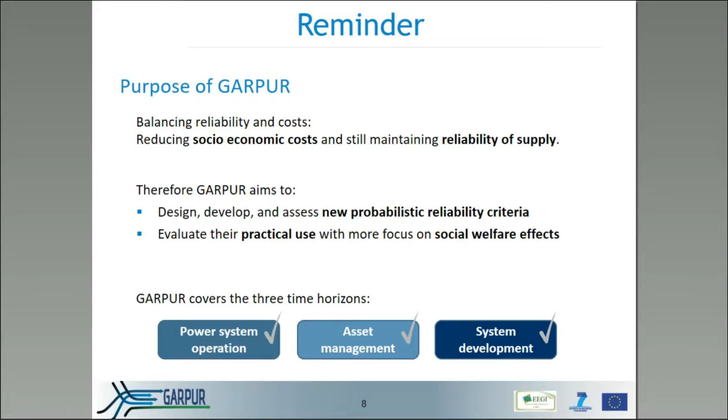I should also recall that the goal of GARPUR is to cover in a coherent way the three main types of contexts where reliability management is carried out by TSOs, namely power systems operations, asset management, and system development. These problems span different time horizons, from very short-term real-time operation to rather long-term in system development, for instance.

This slide summarizes the overall approach of GARPUR. In the upper part, development of a probabilistic reliability management framework, and in the lower part, development of a socioeconomic impact evaluation framework. This should be applicable over the three contexts I've just mentioned: system development, asset management, and power system operation.

In the project, we have developed new criteria and also a prototype quantification platform. One of the pilot tests presented later on by Pascal is based on using this quantification platform in order to compare, from a socioeconomic point of view, the N-1 classical reliability criterion used today in practice with the new probabilistic approach developed in GARPUR.

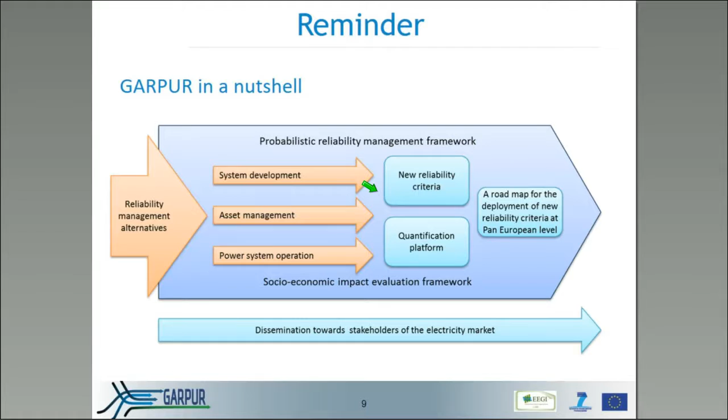Finally, based on these developments, the GARPUR project has developed a roadmap for the deployment of new reliability criteria at the pan-European level, and the last part of the presentation will focus on a very quick summary of that roadmap.

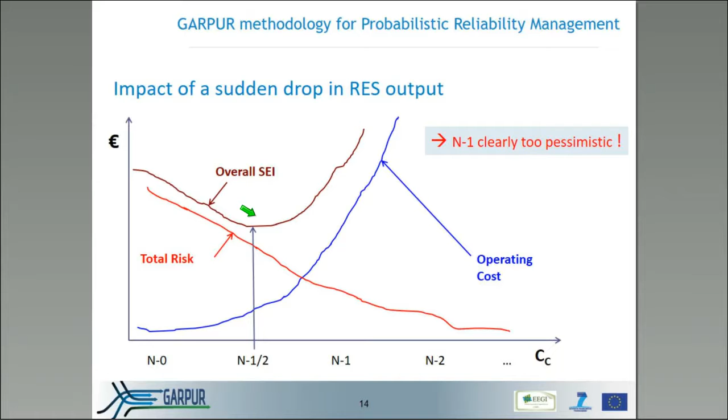Now, if the system operating conditions change, these curves can change as well. For instance, imagine there is a sudden drop of renewable energy output - then maybe the total risk curve will not really change, but the operating costs would possibly increase a lot if you still want to maintain the N-1 criterion, so that the optimum on the brown curve goes to the left, and maybe under these conditions it would be more appropriate to not comply with all N-1 contingencies, but with a smaller subset.

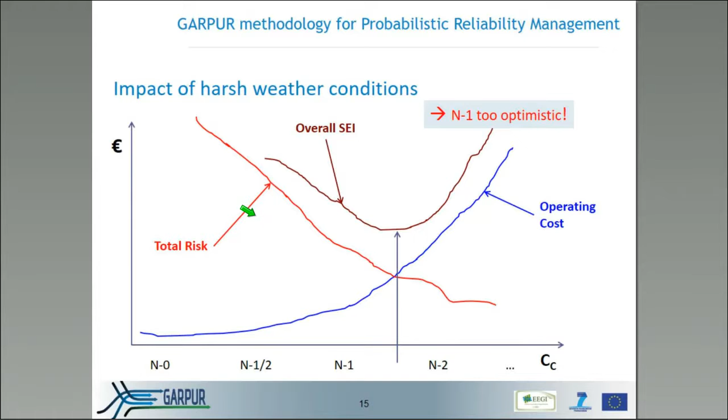And of course, in extreme weather conditions, the probability of multiple failures will increase, and also if there is an interruption, the consequences on the consumers who have no electricity will typically be worse if the weather is harsh than if the weather is mild, so that the total risk curve, the red curve, strongly increases, and in this case, N-1 criterion would be too optimistic, and you should rather add more contingencies to reach this optimum trade-off. So the bottom line is that depending on the conditions, in some cases we should cover fewer contingencies than N-1, and in other cases more contingencies than N-1.

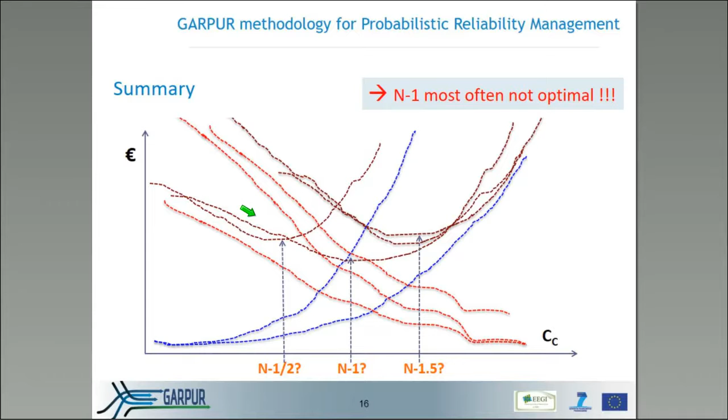So the GARPUR project has developed a coherent methodology which allows us to approach this socioeconomic optimum. The main conclusion is that we need to dynamically exploit all the information that is available in the particular context, for instance in real time. This information has to do with evaluating the socioeconomic cost of service interruptions, but also with probabilities of contingencies and other kinds of failure modes, hidden failures, for instance.

Also, because in operation more and more there is a combination of preventive and corrective control used to operate the system, it's important to take into account the fact that corrective controls, which are taken just after the occurrence of a contingency, are taken under strong time pressure, and there might be some risk of failure of corrective control, so that even if everything was well prepared, the system is not able in the end to withstand the contingency. That has also to be taken into account.

Various factors will influence these probabilities and these costs, like weather conditions, operating conditions if the system is under more stress, and the fitness of the assets of the system. If you have well-maintained transformers and lines, normally their failure rates will be smaller than if you have less well-maintained lines. So this already shows that asset management and maintenance in particular may have an impact on reliability in operation, and this should be taken into account as well.

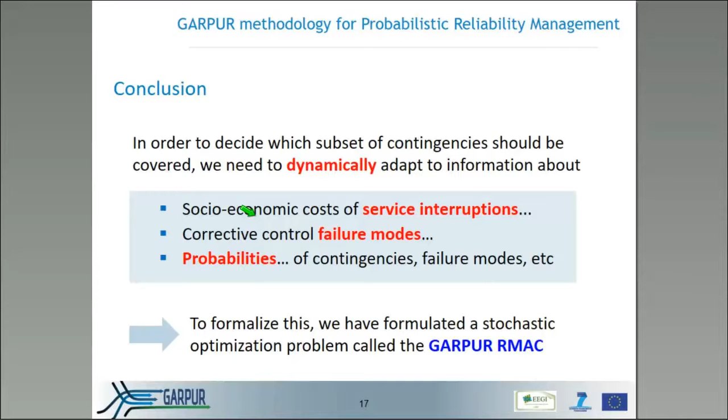Without going into any mathematical formulation here, which can be found in our many deliverables that we have provided in the project, this led to the formulation of a series of stochastic optimization problems called the GARPUR RMAC.

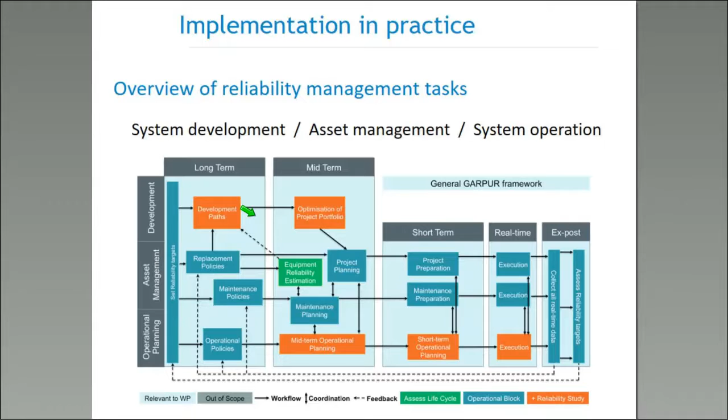And these can be applied to the different problems that the TSOs have to solve, from system development, asset management, and system operation. So I will, for each one of these contexts, discuss a little bit what the problem addressed here is.

To start with system development, the purpose is to identify those transmission capacities needed in the future, and justify how we propose to provide them by a careful cost-benefit analysis. What kind of additional line should possibly be built, and what should be the capacity of that line? Of course, the larger the capacity, typically the better from the market point of view and also from the reliability point of view, but of course the higher the investment costs.

The problem setting here is that you look at a target year or a series of target years over the future, let's say from 2025 to 2035. Then you have to screen the relevant future market and operating conditions over that horizon, identify possible bottlenecks in terms of market and reliability issues by simulating how the system would operate over these years, and from there determine, thanks to the expertise of the planning engineers and the results of these screening studies, whether and where to build new lines.

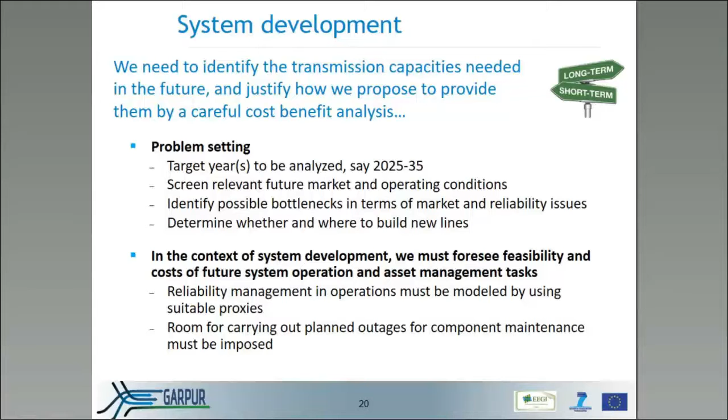So in GARPUR, we do that modeling by introducing the concept of a proxy. I will come back on this also during the next two applications.

Quickly, asset management, which is a very important activity, especially because power system components come closer to their end of life. Most of the lines and transformers that we have in the transmission system are already several tens of years old. So it's quite important to analyze how much and where to invest in maintenance and replacement. How often should we do the maintenance, and where should we do it in the best way, and also the replacement of some of the older equipment.

Once you know how much of these activities you want to plan for the future, maybe 10 or 20 years, you also have to be able to carry them out, which means you have to be able to take some of the equipment out of operation to carry out the maintenance or replacement activities. While these activities will, after being carried out, typically increase the reliability of the system, during the outage the reliability level of the system goes down. So the idea is that you should do these outages at the moment where the impact on operation—this combination of operating costs and expected costs of service interruptions—is the least negative.

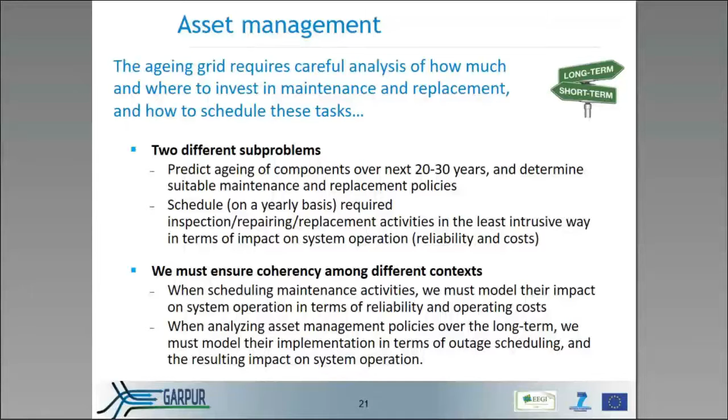Finally, the last class of problems we have worked on concerns system operation, where the question is to take decisions in operation planning maybe a few hours or a few days ahead in time, up to real time. The point is to optimize the balance between operating costs and the risk of power supply interruptions, as I explained in my first set of slides with my three types of curves.

So here we have looked at two problems: the real-time operation problem, where the point is to take into account current operating and weather conditions to evaluate risks of power supply interruptions over a relevant set of possible contingencies and to mitigate them.

And in look-ahead mode, operation planning, where the point is to prepare real-time operation to ensure robustness with respect to uncertainties in load, renewable infeed, market, and weather conditions.

In look-ahead mode, you can still postpone some outages planned for maintenance, or you could possibly reduce the capacities given to the market if you think the weather conditions will be extreme and it is better to reduce a little bit the distance from generation to consumption.

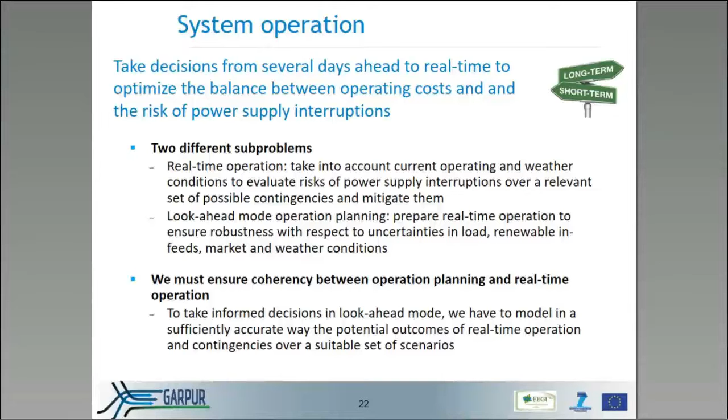This finishes my introduction with the following slides, where these different Russian dolls basically represent the different contexts, let's say from the extreme right part, where we have the automatic response of the system, and then real time, going progressively towards the left part of the slide: real-time operation planning, maybe midterm outage scheduling, and so on.

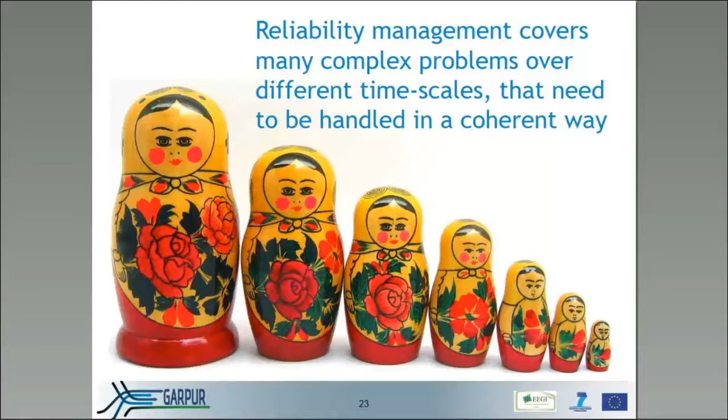So with that, I give the word to Gudjon for the presentation of the results from near real-life pilot testing at Landsnet. Thank you. Yes, thank you, Louis.

In this webinar, I will quickly go through the results of the Landsnet pilot test by answering these three questions: Is the computation fast enough? Does the output make any sense? And how sensitive are the outputs?

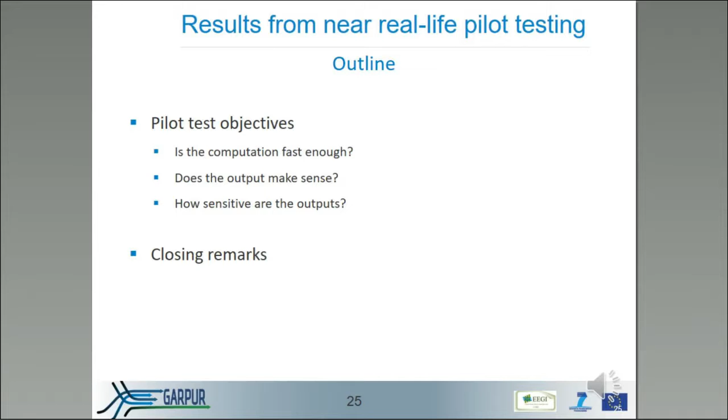Description of the pilot test implementation and methods can be found in detail in the first webinar of this series. But here is a short overview of the Icelandic system and the model. The Icelandic system is small and thus manageable for a pilot test like this. The model we used contains 85 buses, 107 branches, 71 generators, and 65 loads.

The pilot was programmed with performance in mind from the start, but that was not optimized against, since we felt it was more important that it would work and be simple to debug and validate the outcome. The pilot was built in MATLAB using MATPOWER and IPOPT, with additional auxiliary tools made in Python, and outputs and displays written in HTML and JavaScript.

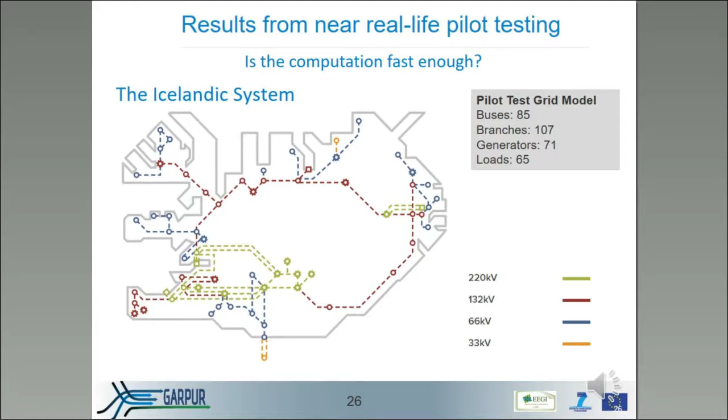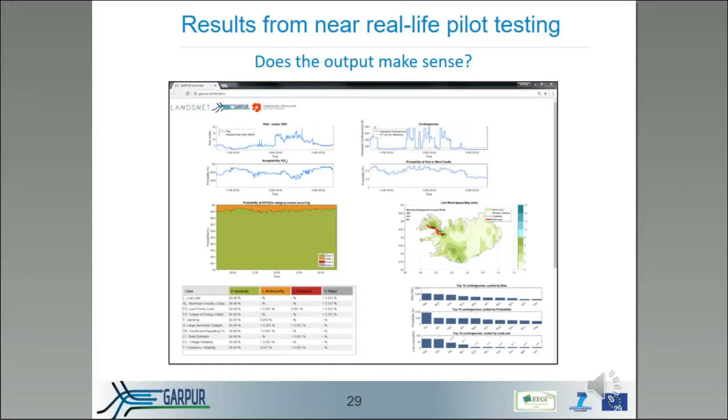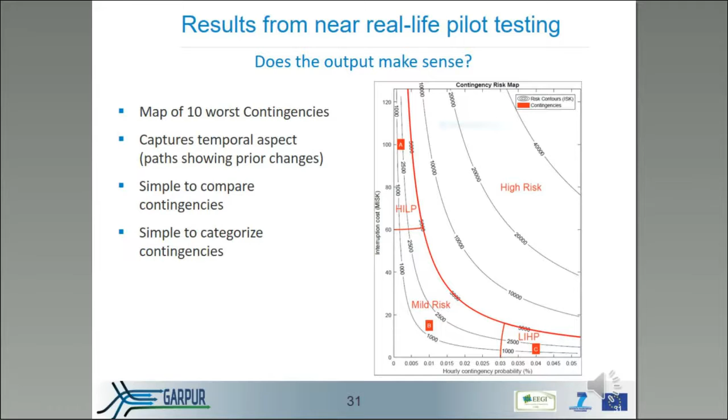This figure is the same as the previous one, but it shows how you can categorize the contingencies that you have and see if it represents what you feel for each one of them.

If you know that something is rare and has high impact, it should be in the box marked A: high impact, low probability. And if it moves to the right into the high risk zone, you might want to check in on that.

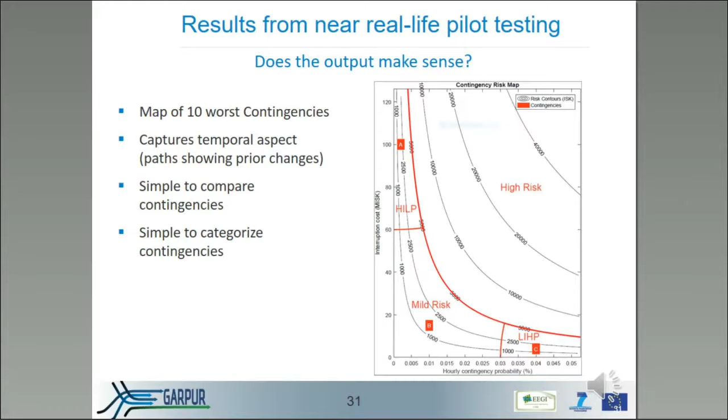We feel that this represents what the operator is thinking in the control room, since from experience he knows it's more likely for things to happen in storms than in calm weather.

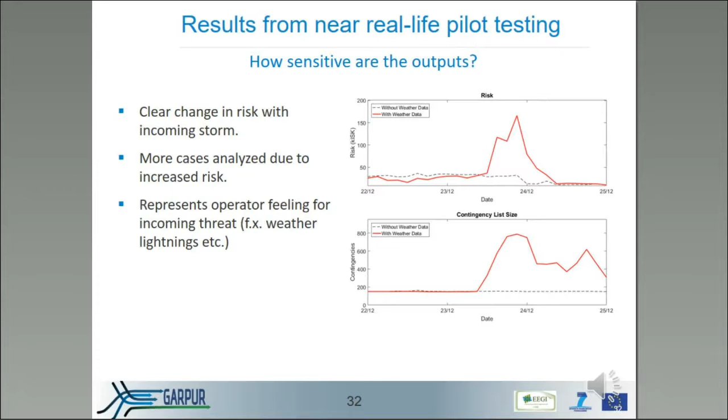We also compared the risk with and without system integrity protection schemes. In our system, we have a couple of those schemes in place, and we found that in some cases the risk was greatly overestimated if they were not taken into account.

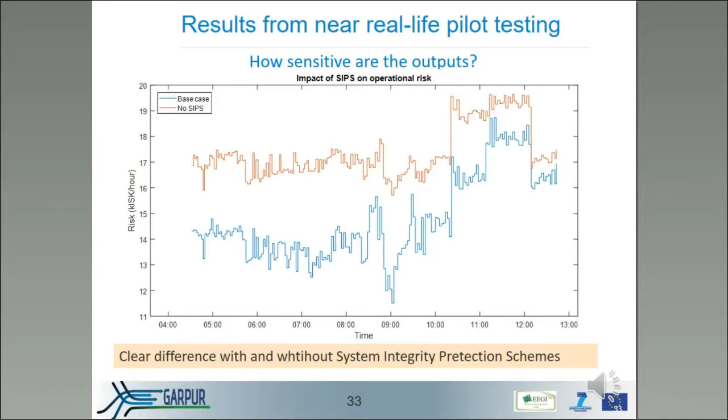The pilot showed that this can be done, and that this can be calculated for near real time, without using huge computers.

The output represents the operator's feel for the system and impacts of threats. In most cases, the outputs agree with experts, but we admit that we still have some bugs and sometimes have something weird going on.

We see a need to validate the individual modules of the pilot test and the methods proposed in GARPUR. For future implementation, there's a need for a fast estimation of dynamic events.

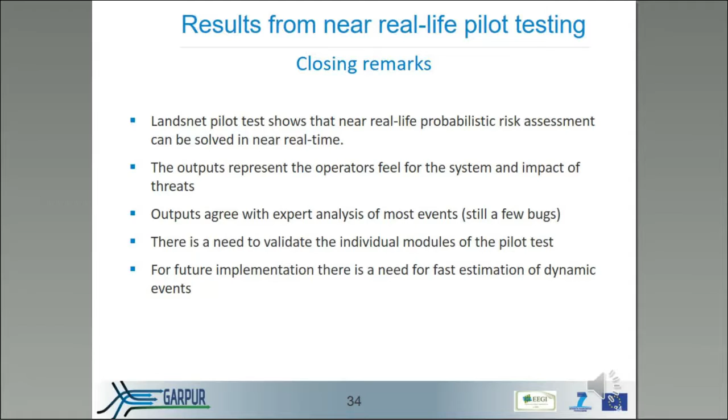And that concludes my talk, and I hand it over to Pascal.

Okay, thank you, Pascal from RTE R&D. So I will present the RTE test case study using the GARPUR quantification platform prototype.

First, the pilot test objectives, then the GARPUR, the GQP main features of the test, and the test and closing remarks.

The pilot test objectives were to highlight the differences between the classical N-1 reliability management criteria and the more probabilistic ones using the GQP.

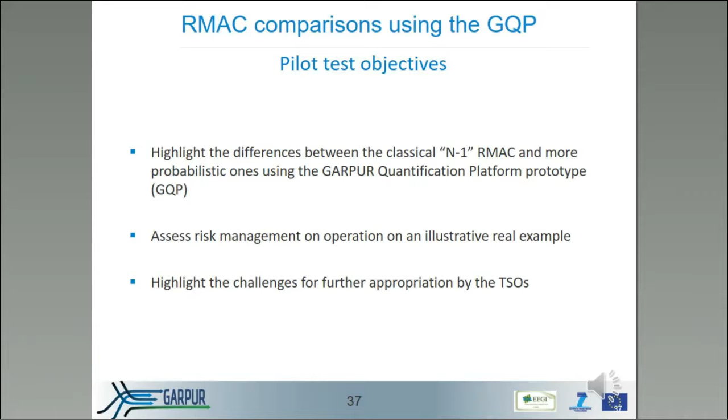And to assess risk management on operation, but this on an illustrative real example, in order to highlight the challenges for further appropriation by the TSOs.

Regarding the problematic considered, we are dealing with congestion flow management on the southeast region of France.

We focus more precisely on the so-called Tavel-Realtor corridor, which has been responsible for two-thirds of RTE's congestion costs in 2013, and we will look at risk management derived decisions versus real-time decisions.

So in yellow, you can see the Tavel-Realtor corridor, which is formed by two 225kV lines, and in brown you have alternative paths, alternative electrical paths.

The purpose here is to balance the flows on those different paths in order to supply the load in the blue zone, which could be very problematic due to the fact that generation is limited in the blue zone.

You also have to consider seasonal aspects, like renewable energy source variations in the blue zone.

Today, the present operating rule is that we take into account preventively the N-2 Tavel-Realtor, depending on weather conditions, for example, if we anticipate storms or fires in summer.

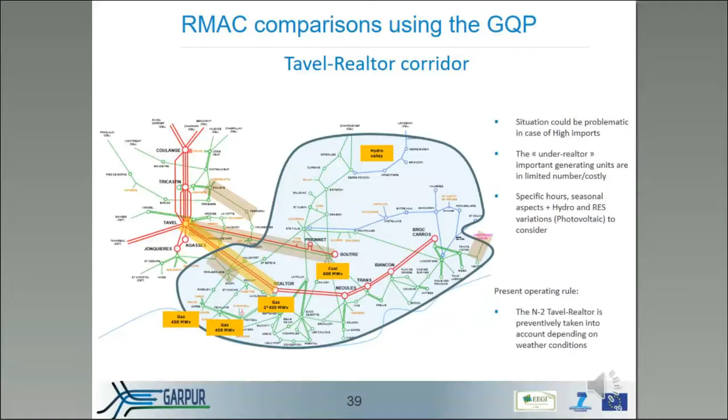We use a two-level optimization problem for arbitration between preventive and corrective actions to build the preventive solution.

The GQP uses a CPLEX mixed integer linear program solver in order to model those arbitrations, to take into account TSO acceptability constraints on the solution given by the GQP, to model generation startup, phase shifters, topology shifts, and to model also failure of corrective actions.

The computations are done using the DC direct current approximation, but there are AC checks in order to validate those computations performed in DC.

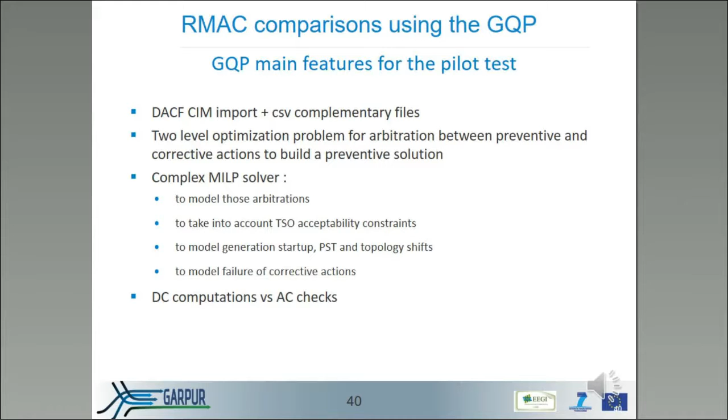So we use the three-step approach provided by the GQP. First, we build a preventive solution for a specific RMAC and a specific set of contingencies.

This is based on the best forecast which is given by the DACF file. And then we use the uncertainties we have around the forecast in order to build adjustment, real-time preventive adjustment of the day-ahead preventive solutions.

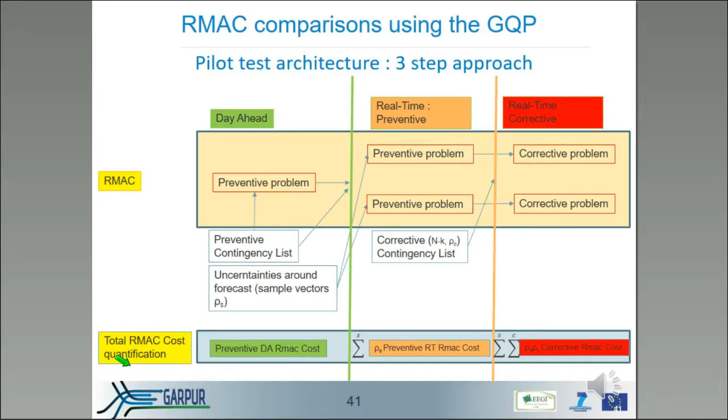And we finish with a last stage corrective problem, which is performed on a larger set of contingencies. So when we sum up the three costs, the day-ahead preventive cost, the real-time preventive cost, and the corrective cost, we have the total cost quantification which is associated to the RMAC.

For comparison, we have defined four RMAC comparative problems, which are the N-0 problem. So we don't consider the contingency for the preventive solution.

The classical N-1 problem, only N-1 contingencies are considered to build the preventive solution, but with the same probability and without authorizing a trade-off between preventive and corrective actions in order to build the preventive solution.

And we have also two statistical RMACs. The first one, called RMAC N-1, considers only N-1 contingencies, but we use their probabilities and we authorize the trade-off with corrective actions in order to find preventive solutions.

And we have also the RMAC N-2 problem, which is similar but with the addition of N-2 contingencies in the problem in order to build the preventive solution.

And we finish, for all the RMACs, with the same last stage corrective problem, which is identical, which gives us the residual risk estimation considering the effect of a preventive solution.

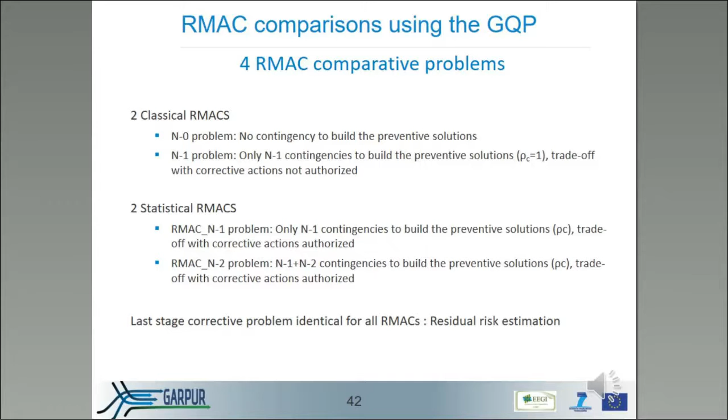So we have defined first a base case parametrization in order to compare the four different RMACs on a fair basis. And then we have performed complementary sensitivity tests in order to highlight the impact of the contingency failure rates, the uncertainties around the forecast, the TSO acceptability constraints and failure of corrective actions impacts, control action plus more N-K contingencies put into the problem.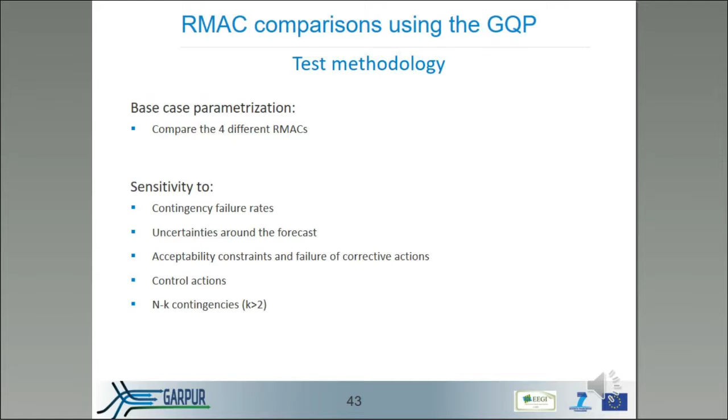On the base case parametrization test, we have put into evidence the fact that the N-0 problem could be over costly. This is due to the fact that the residual risk is not mastered for this problem.

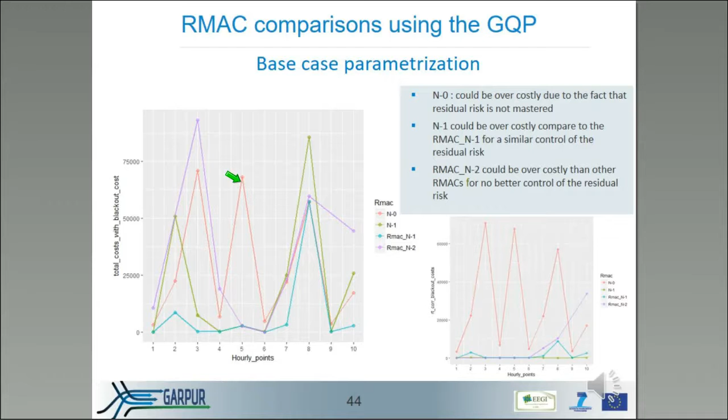If we compare now the N-1 problem in green to the RMAC N-1 problem in blue, we can see that the N-1 problem could be over costly compared to the RMAC N-1 problem, and this for a similar control of the residual risk. But for the RMAC N-2 problem, we find that this problem is more costly than the other RMACs for no better control of the residual risk.

If we look now at the tests which have been performed on sensitivity to contingency failure rates, we have multiplied the failure rates by 10 in order to simulate the effects of adverse weather conditions. So we can see that the N-0 problem, which is normal, is getting worse.

For the RMAC N-1 problem, we can see it tends to mimic exactly the N-1 problem, which was expected. The RMAC N-2 problem is always more costly for not a better control of the residual risk.

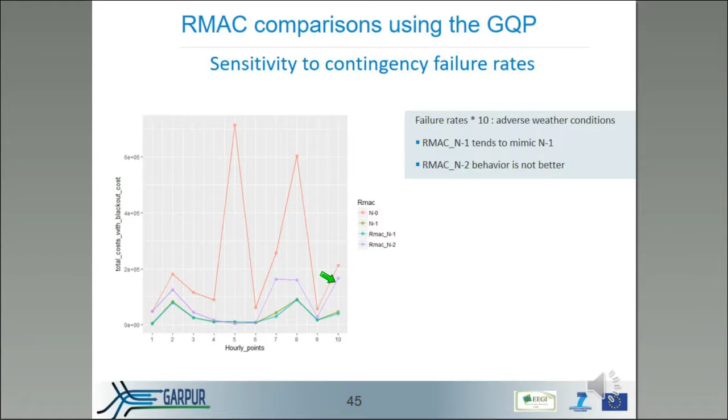So to finish, I will say that there are some sensitive issues to consider in order to perform such studies. We have used the GQP, which was a research-grade prototype, and you have to consider performance and tractability issues, but also result interpretation and validation.

It could also be interesting to deal with a more complex RMAC implementation, such as taking into account uncertainties in the day-ahead preventive problem, taking into account larger problems, reactive and dynamic phenomena, and also multi-TSO interactions.

Regarding the data, we have observed a high sensitivity of the RMAC to the blackout costs, the failure rates, and failure of corrective actions. We think that if we can reach a better confidence in the estimations of those three parameters, it will ease further acceptance of the RMAC by the TSOs.

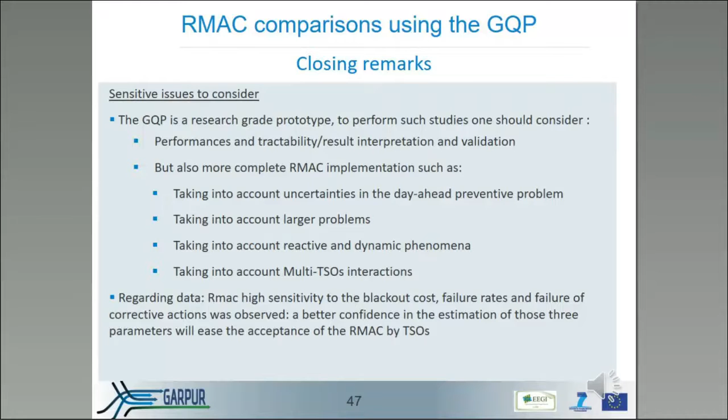Regarding the benefits of the approach, we can say that the RMAC N-1 problem is well positioned and is consistent with intuitions. Regarding the introduction of N-K contingencies, N-2 or N-3 contingencies in the preventive problem, these should be economically weighted and justified. But we can also say that high preventive costs could be justified in case of difficult operational conditions.

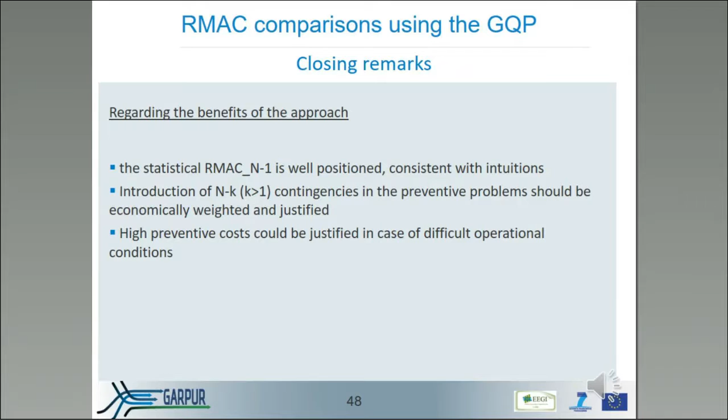I will talk to you about the result of a pilot test case for the system development. So the goal of this test case is to integrate in the tools used by ELIA the approach developed in GARPUR and to compare this approach with the current approach used by ELIA. The most important aspect is the screening of operating states.

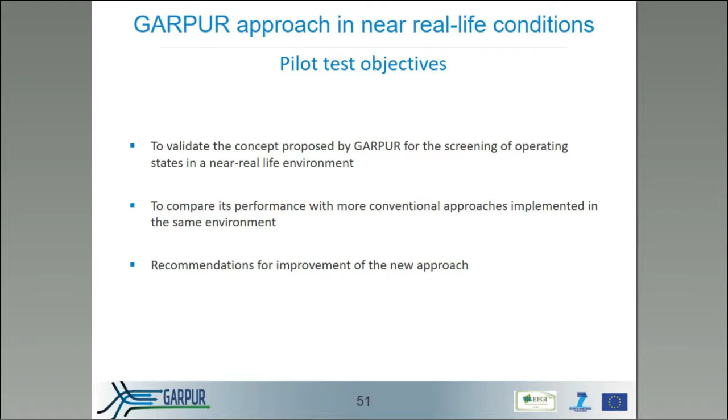The challenge in the system development context is that we have no certainties on the evolution of regulatory frameworks, or on the fuel price, or on the generation mix and localization. So it's necessary to consider all likely futures, and the exploration of several futures requires generating a lot of operating states. But after generating these operating states, it's necessary to have a methodology to assess the robustness of a network for each of these operating states.

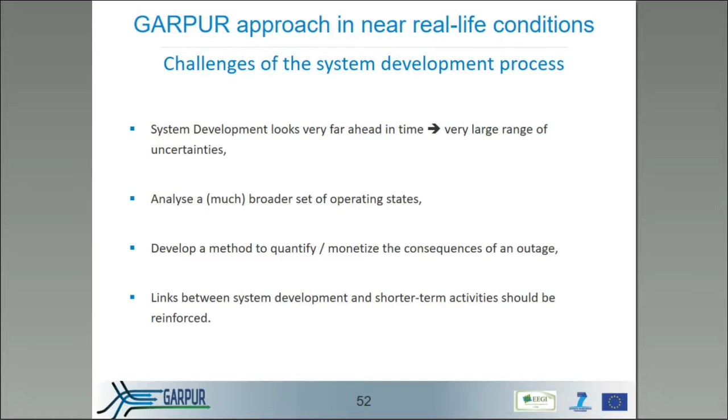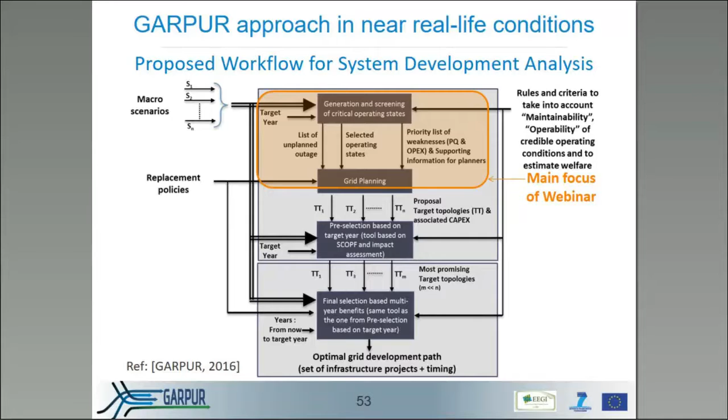For the first step, for the reduction of the number of credible operating states in ELIA, for the regional study, for example 70 kV, we show only 5 operating states to cover extreme situations, for example peak load or no decentralized production, or opposite, low load and peak of decentralized production. But for the European studies, in the extra high voltage, we show 100 operating states.

The main idea behind the selection method is that the duration curve for each of the inputs must be adequately covered, as shown in the figure in this slide. In the GARPUR project, we use the K-means algorithm in the software MATLAB for regional and European study and so on.

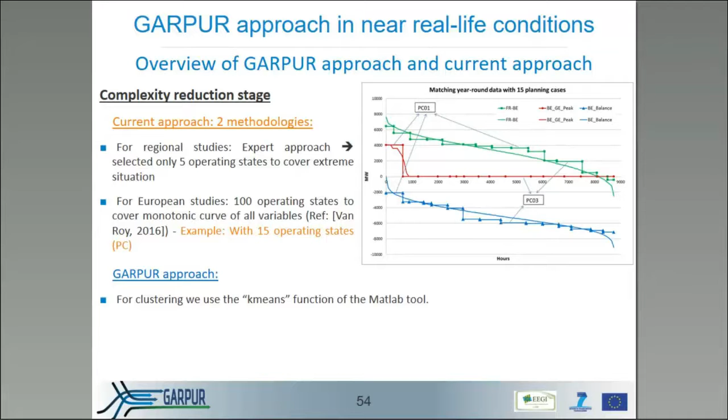For the second step, we find the critical operating states. Actually, in ELIA, we perform a security analysis for all N-1 situations, but we don't estimate the cost to solve the constraints. All operating states that have constraints are kept for more accurate evaluation by the planner.

In the GARPUR approach, we use a security-constrained optimal power flow called OATS, developed by the University of Strathclyde. OATS makes it possible to calculate the cost necessary to avoid constraints in N and N-1 situations. All the operating states that have operating costs are kept for more accurate evaluation.

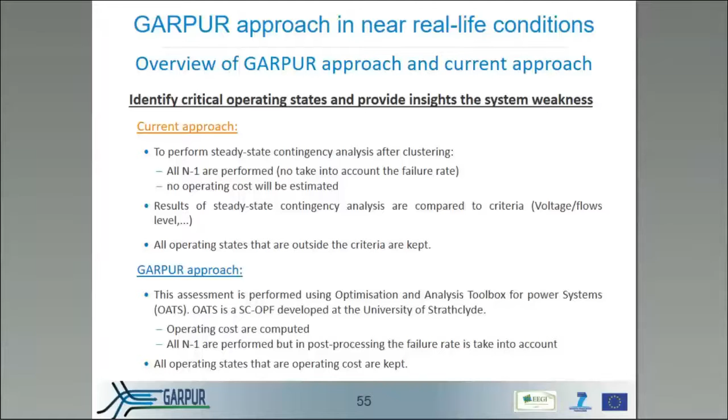These 2 approaches for these 2 steps are tested on this network. This network has 8 70 kV substations. The needs of this network are the end of life of the 70 kV line and the integration of wind production, because here the potential of wind is equal to 400 MVA.

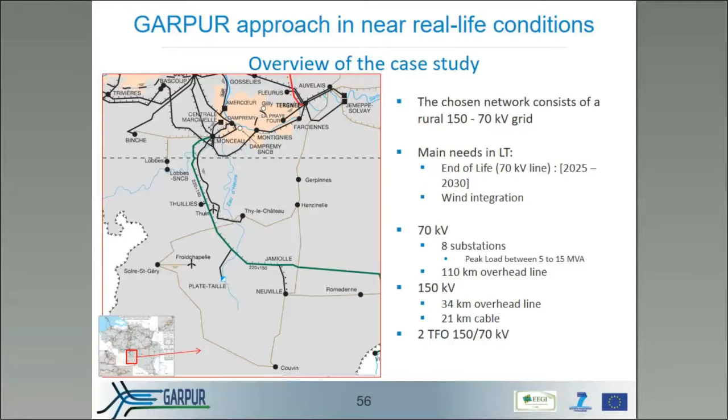After presenting the comparison, I show you the results for security-constrained optimal power flow on all data, the full data set for 1 year. So here you see 14% of operating states are insecure.

This point becomes secure if you curtail the wind production, but this curtailment generates an operating cost of 414 k€ per year, and this cost takes into account the probability of having an N-1 situation.

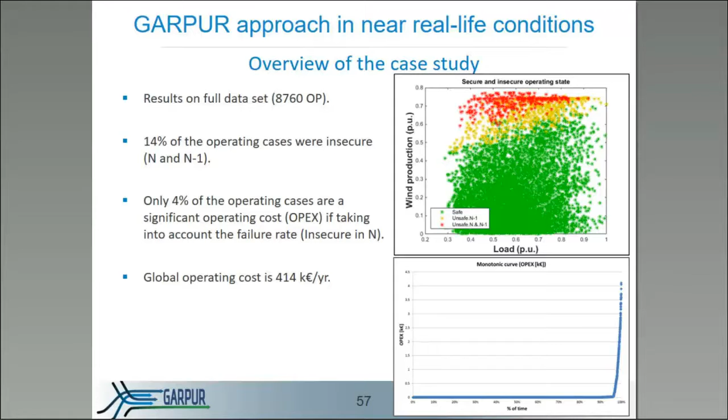If you go to the next slide, here to compare the two approaches, the approach in ELIA and the approach in K-means, and to keep the cluster number equal to 100.

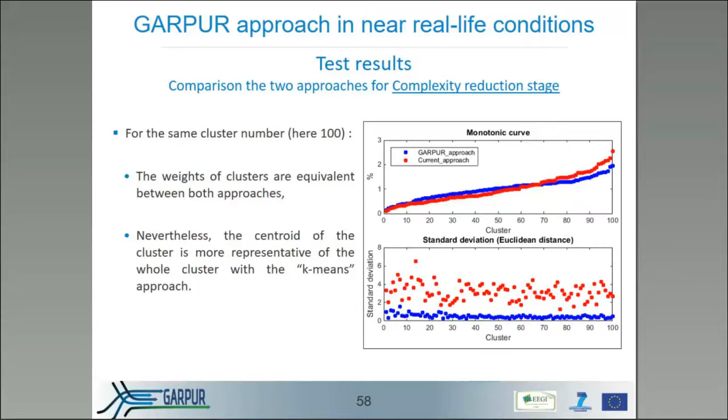And if you go to the comparison with step 2 to identify the critical operating state, if you take 100 clusters, the two methods give an almost equivalent number of critical scenarios to be analyzed by the planner. But it's important to note the method used by ELIA overestimates the operational cost, whereas the K-means algorithm leads to an underestimation of operational cost, and you find the relative error in this table.

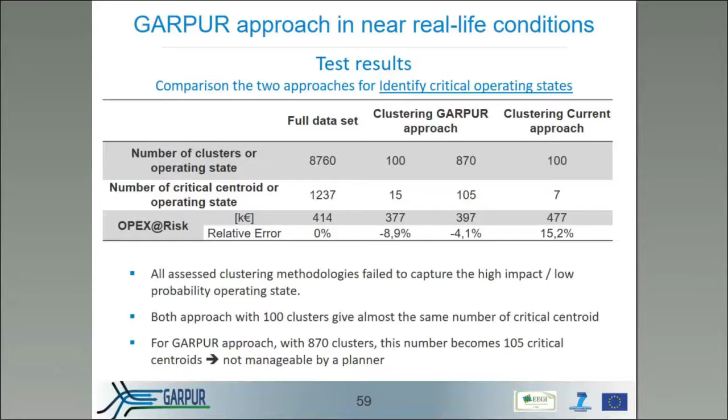In conclusion, one final element is that the K-means algorithm is faster compared with the ELIA method.

In conclusion, the K-means algorithm is a plausible alternative to the current method, and it has been used in ELIA since the beginning of September. And the whole pilot test case has shown that the method developed under our work package 4 in the GARPUR project can be used within the TSO business.

Thank you for your attention. I give the floor to Louis to present the recommendations.

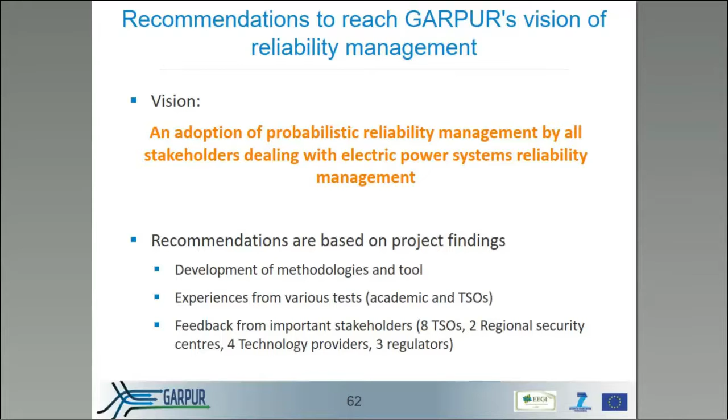Yes, thank you. For the sake of time, I will go very quickly through these slides because we would like to leave a little bit of time for questions. So the recommendations of the GARPUR project, now that the project reaches its end: first of all, we are convinced that probabilistic reliability management should be adopted by all stakeholders dealing with electric power systems reliability management. These recommendations are based on the findings of the project, and we have clustered them into four different categories.

First of all, regulation and socioeconomic considerations. These recommendations span over a period of 5 to 10 years. We have further work to be done specifically by TSOs in order to better understand the benefits, the distribution effects, and the needed investments. We also need introduction of regulatory changes if we want to move away from N-1 towards a probabilistic approach, and the proper incentives to do that in the best way. And finally, with a new approach, a new way of coordinating reliability management practices in Europe is also needed.

Then obviously, the new approach will need additional data, and it has already been stressed and found out in the pilot test that to gain confidence, we need to make sure that data about probabilities, costs of service interruptions, and so on should be as accurate as possible. And of course, in order to allow a TSO in an interconnected system to apply the approach, it also needs data from neighboring TSOs, so there need to be additional guidelines for collecting, maintaining, and sharing the data and the probabilistic models among TSOs.

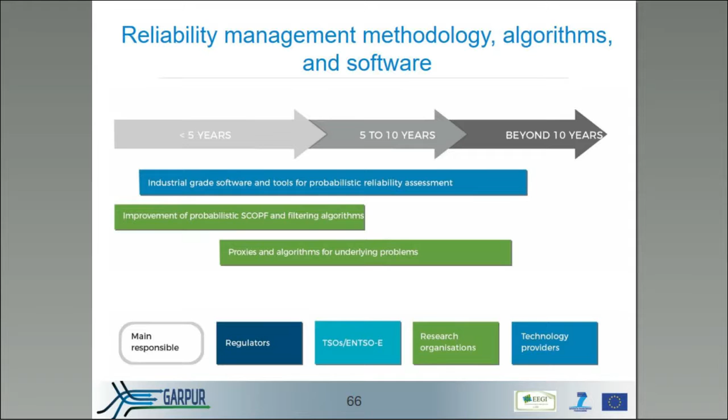And of course, in the project, we have developed a certain number of prototype software like probabilistic SCOPF approaches and reliability assessment methodologies, as you have seen. But of course, this software has to now become mature, and therefore we need also investment from technology providers and further progress in terms of research as well.

And finally, we recommend a progressive approach in order to improve the knowledge, testing, and gain confidence. So therefore, we would like the research community to use open source test cases and software so that we can really reproduce the results, and TSOs should go on further with pilot scale testing in as many organizations as possible and in different contexts from long-term to real-time.

And of course, as you might understand, these approaches, especially for the longer-term problems, will need massive numbers of simulations using Monte Carlo-like approaches, and therefore we need to ensure that the proper high-performance ICT infrastructure is available for TSOs.

So for more information, please go to the web page of our GARPUR project, where you can get lots of details about all this work, the public deliverables. And also I would like to inform you that we have the final conference of the project on Tuesday and Wednesday, October 17-18, in Brussels, where we'll present the results of the project in one day, and in the next day discuss how to move towards real-world application of these results in the future years.